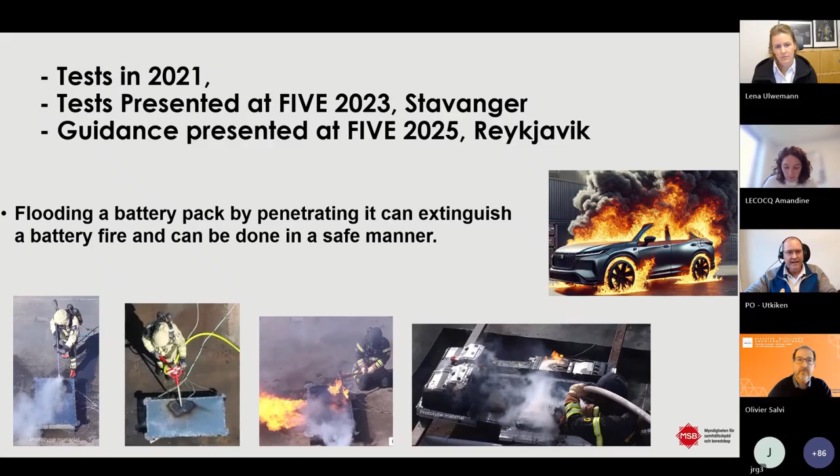Here is the key to what we are talking about. If you look at this, you see thermal runaway for a couple of seconds, and then it's a regular fire. During this process, we heat the adjacent cells. By getting water into the battery pack, we cool the cells that are on fire with thermal runaway or fire afterwards, and we cool the adjacent cells. That is basically the key, to get water inside and then cool as much as we can.

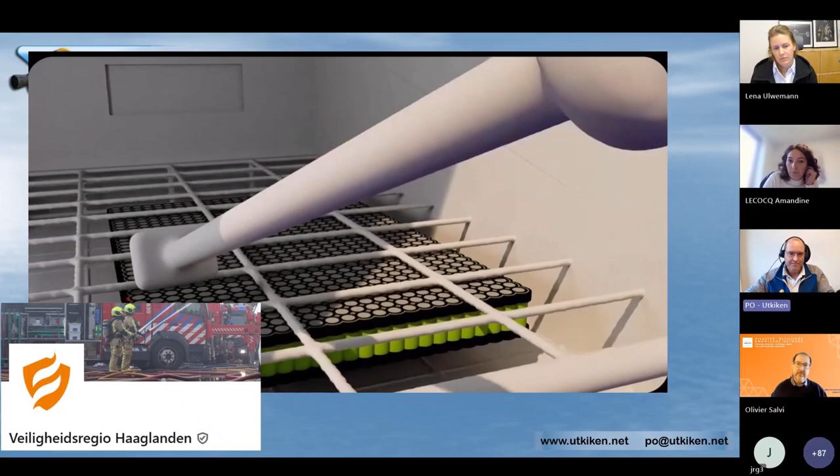This is a video clip from the Netherlands Fire Brigade which illustrates it very well. If we spray water into the battery pack and cut a hole in it, we might start new thermal runaways, like the last red cell you saw there. But since we are at the same time getting water into the battery pack, we are cooling the other cells. So it doesn't really matter that we get a new thermal runaway or several new thermal runaways, because the water will do what it's designed for.

After our test, we have seen tests in the Netherlands last year that were successful. The NIPV did some testing there, burned two EVs, and in both cases it was a success. In France in June, we saw SDIS 91 do their testing, also successful. So we're starting to get the evidence that this works, and it will also keep the batteries extinguished most of the time. We don't have immediate reignitions. There are certain times in the process where it's more likely, but overall it's been working very well.

In Sweden, we have some real-world operations. Here we had a vehicle with a thermal runaway in the battery pack, extinguished with a fog nail - I'll get back to that. The second one was a vehicle put out with a cutting extinguisher, and then we had an electric bus that was also put out with a fog nail. From the MSB perspective, the Swedish Civil Contingencies Agency, the fog nail is not a recommended tool, so this was done without following the recommendations. But what we saw was that we got water inside the battery pack and it worked.

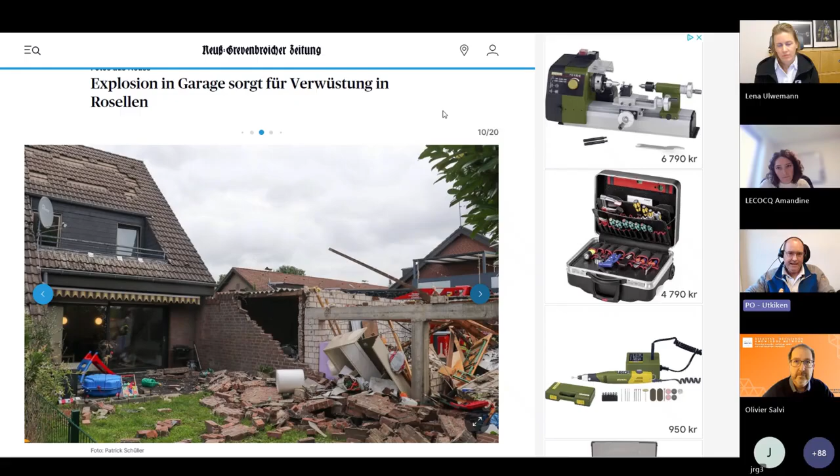Then I'm going to talk a little bit about explosions, because I think that's the largest hazard we have to navigate through or around. We have all seen those pictures. This was an explosion in a vehicle where the garage roof was blown away, the walls were blown away. We have different levels of this - this is also something you've all seen, the Jeep at the fire station that blew the roof up in the air due to a gas explosion.

What this gives us is that we have to navigate all those different events. It's not always super dangerous, and we can have a fire in a battery pack where we have the white gases, the smoke as I call it, but we might be able to do something about it.

Our thoughts here is to handle it like a gas leak. If you have a flaming thermal runaway, then it's much better from an explosion perspective than if you have a smoking thermal runaway. Firefighters have a lot of tools already in the toolbox if we think of it as a gas leak of a combustible gas.

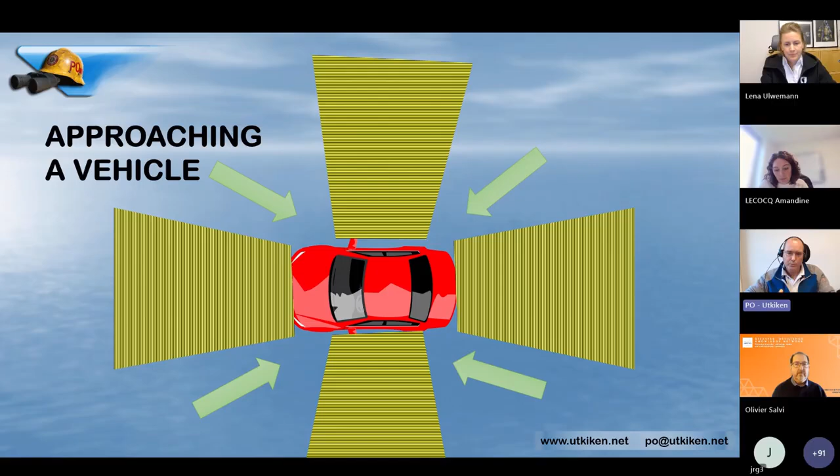For example, approaching a vehicle, we know that it's most likely that the pressure from the explosion will go to the sides. So if we approach the vehicle from 45 degrees, we can get closer to the vehicle. If what we want to do is ventilate it, this is a very good example from the Netherlands, where they use a cutting extinguisher with abrasive to break one of the windows from a distance. In that way, they get the vehicle ventilated.

The other example is the one I showed you from Sweden, where they used a tool to break the window, wait for a while, because that seems to be like with a regular backdraft, that it takes a while for the oxygen to get into the compartment, and then we have the ignition.

If we now want to get water into the battery pack, when can we expect a result? Because that will also vary. And it will vary because of the tilt angle of the vehicle, if we are in the correct compartment, because we can have vehicles with several compartments, and there the rescue sheets are very valuable.

If we, for example, have large holes in the bottom of the battery pack, like Tesla, for example, where their battery pack bottoms can burn away, and if we have that kind of construction, then this method will not work. So we need to be aware that it's not a single solution for everything.

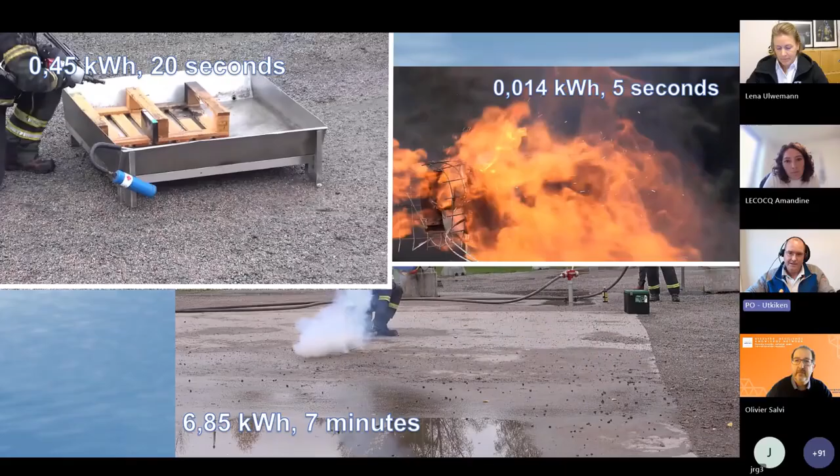Also, cell and module size matters. This is what I'm talking about here. We have three different sizes. The smallest size, they have a thermal runaway for 5 seconds. So if I get water inside the battery pack, it will be very fast for the cooling to work.

The upper left, we have a 0.45 kilowatt hour battery cell, and that thermal runaway will go for 20 seconds. In the bottom, we have a Volkswagen battery module with pouch cells, which will go through the module for 7 minutes. Since we are talking about cooling the adjacent cells, we can't expect a result from the cooling until we have the original thermal runaway burned through.

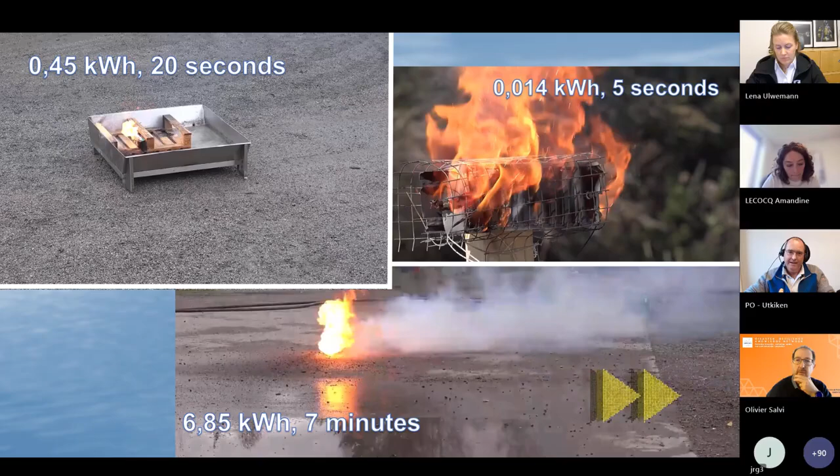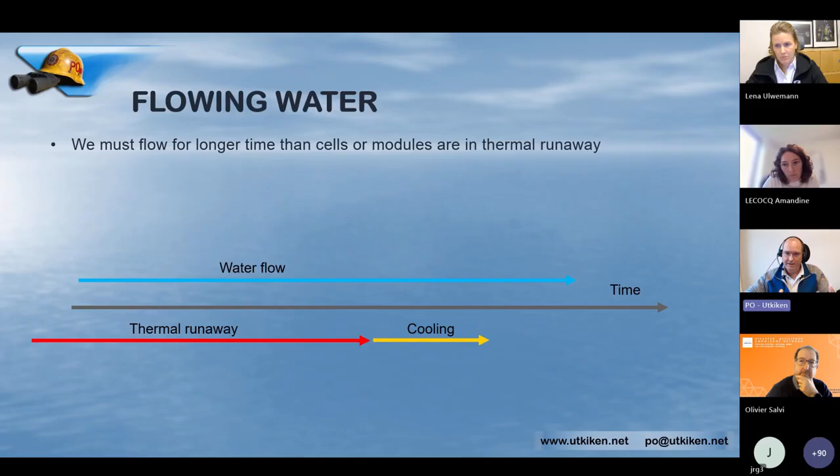What that gives us is a timeline for how we must flow water. So we must flow water long enough to outlast the thermal runaway. We need an additional cooling time plus some extra time. This, I think, can be frustrating for firefighters, because we can stand spraying water for like 7, 8, 9 minutes, and we don't see any results because the thermal runaway is still going on in the original cell. But then we need to be patient with it.

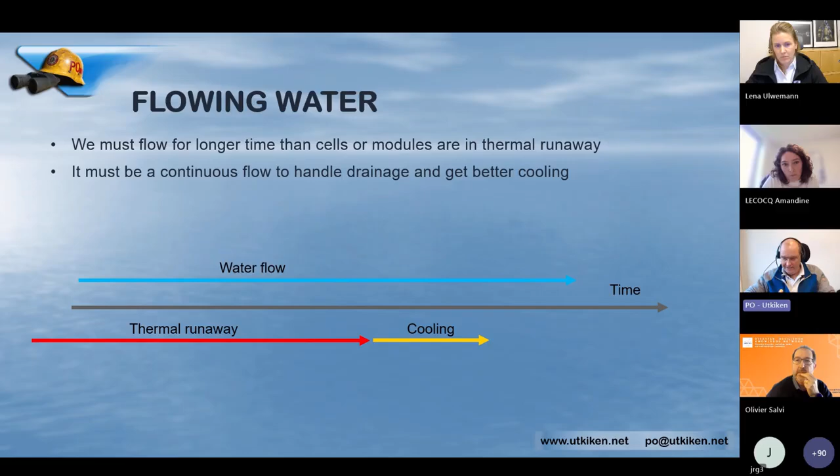Finally, I would like to show this video here. If this is what we have when the caller calls to the dispatch center, they say we have lots of flames, we have a lot of smoke.

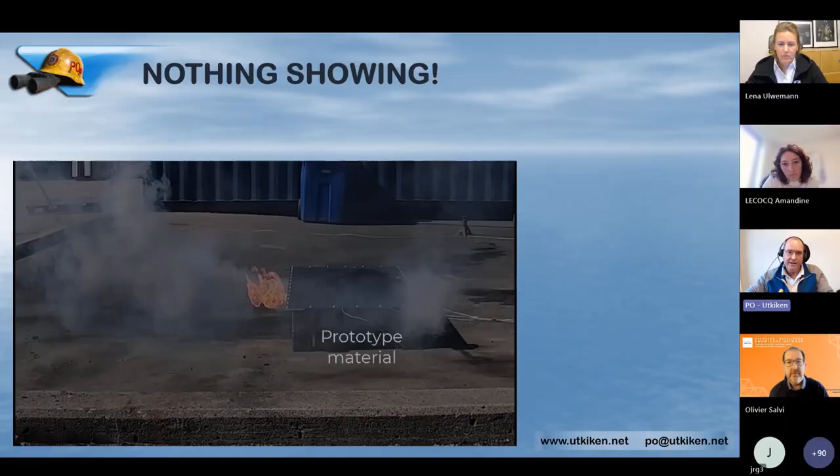Battery packs are today very well designed. They are designed not to burn and to have a slow fire spread. This means that what we're looking at now could be what the fire service sees when they arrive. That is nothing. So we need to be aware of that and use that time wisely to prepare for what could happen when we start to get this fire again.

Also talking about good design, they are designed to be able to handle a single thermal runaway, and sometimes that works. If that is the case, then we should not make any holes in the battery pack, because then we have a self-contained battery pack fire. With that, I would like to go to my last picture. I'm just going to see if I can do that here.

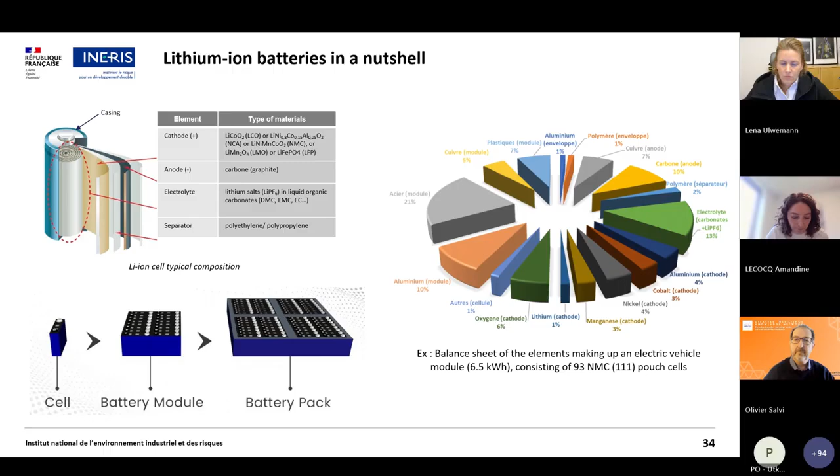As you know, lithium-ion batteries are prone to thermal runaway phenomena. This thermal runaway can occur when the battery is subjected to external aggressions, such as mechanical, electrical, dysfunctional, or thermal aggression. Or it can occur due to internal factors, such as manufacturing or design defects.

The thermal runaway of one cell can propagate to adjacent cells, to the complete module, pack or rack, or even to the complete vehicle or system.

Different effects can occur during thermal runaway. It can lead to gas and particle release, fire, explosion, as was shown by Paola, and also projections of incandescent materials or small cells.

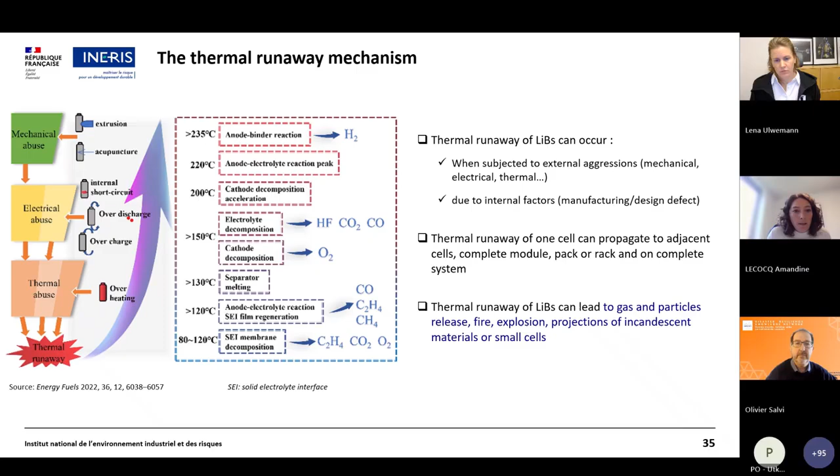Here is a summary of these different effects. During thermal runaway of lithium-ion batteries, heat is generated, producing thermal effects and also fumes. These fumes are composed of flammable gases, toxic gases, and particles. We'll go into more detail in the following slides about this composition of fumes.

In some specific cases, projections can also occur, also called the missiles effect. These projections are mainly seen during fires in storage or recycling plants, or in some specific cases of violent crashes of electric vehicles. It's mainly due to the small cells found in these types of packs on different vehicles or in bulk storage, for example.

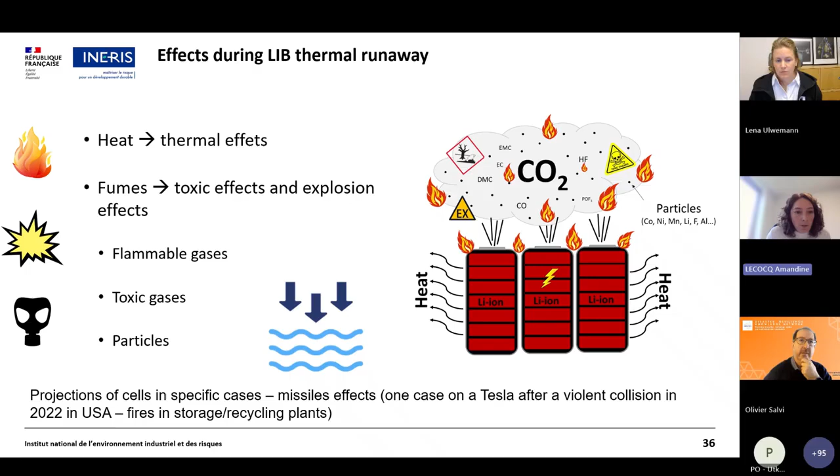Lithium-ion batteries are involved in many accidents across many applications, from the smallest like smartphones or scooters, through medium like cars, and also the largest like battery energy storage systems (BESS) and recycling facilities. Here are some examples and pictures of accidents that occurred in these many applications.

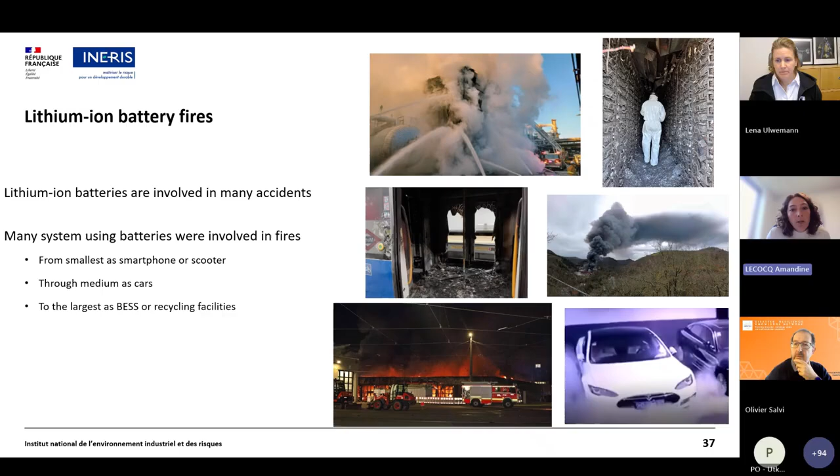Here is an example of an accident that occurred on a BESS in the south of France in 2020. It was a mixed electrochemistry of lithium iron phosphate and supercapacitor. It was a new container being put into service. A fire occurred in a BESS container that contained batteries.

The difficulty in this case was that these BESS containers containing batteries were stacked, one container above another. This posed difficulty of access for firefighting services, and also at this site there was a lack of nearby water points, making it difficult to extinguish the fire.

Also, this container was equipped with an extinguishing agent based on phosphate salts, but it was inefficient to tackle the fire.

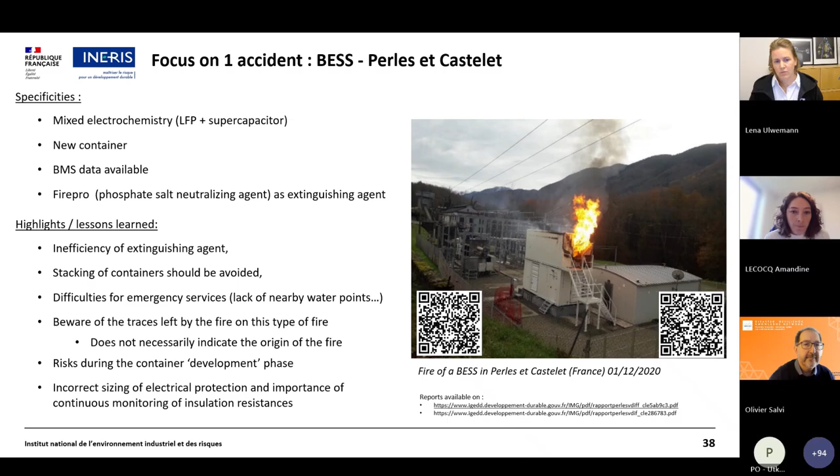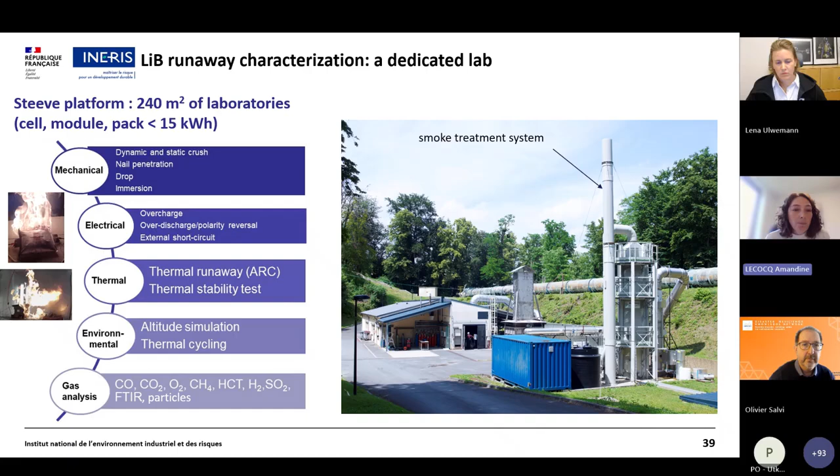At Ineris, we have different safety platforms to characterize lithium-ion battery runaway. The first is the Steeve platform, where we perform different types of tests: mechanical abuse, electrical abuse, and thermal stability tests on batteries, to characterize the effects and also analyze the gases emitted during the abuse tests, as well as particle analysis.

The second platform is the fire platform, used to perform fire tests but also mechanical and electrical tests on larger batteries, since the test chamber is a higher size. For example, we have a very large fire safety chamber of 1,000 cubic meters used to perform tests at pack level, electric vehicle level, and system level. In this platform, gas analysis and particle analysis are also performed.

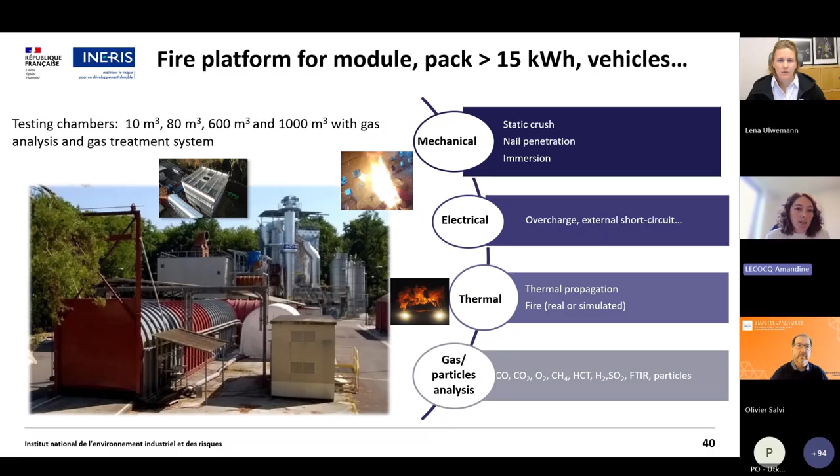So we have different types of measurements, such as physical measurements, in-situ generation characterization, and online gas composition measurements, including smoke and particles. We also perform water sampling and composition analysis. I will show you some examples of results we have.

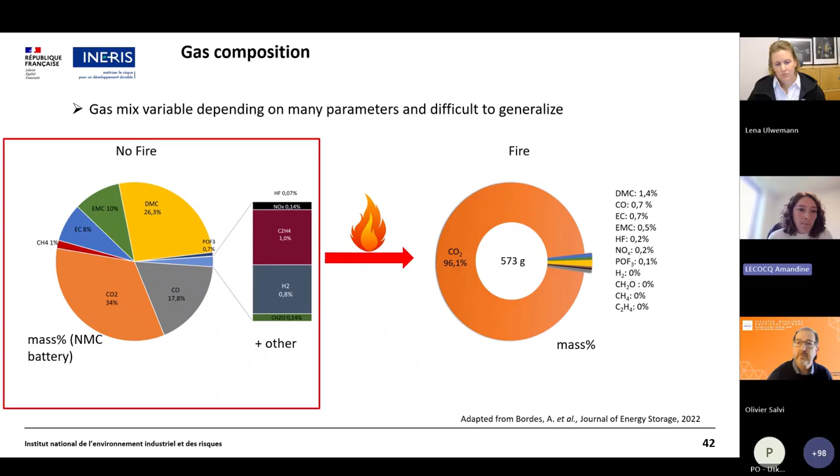Here is the gas composition of two cases. On the right is the typical composition of a battery fire when we have little fume generation, so it's mainly fire. In this case, the main gas produced is CO2, at more than 90%. On the left is a case where we have only fumes, and you can see the composition is completely different, with a lower amount of CO2 and a higher amount of flammable gases, as represented in this graph.

In the case of fumes, we have highly flammable gases such as hydrogen, methane, ethylene. Also both toxic and flammable gases such as carbon monoxide and carbonates, which are the solvents used in the battery. And also highly toxic gases such as formaldehyde and HF, and in some cases POF3, which is also toxic.

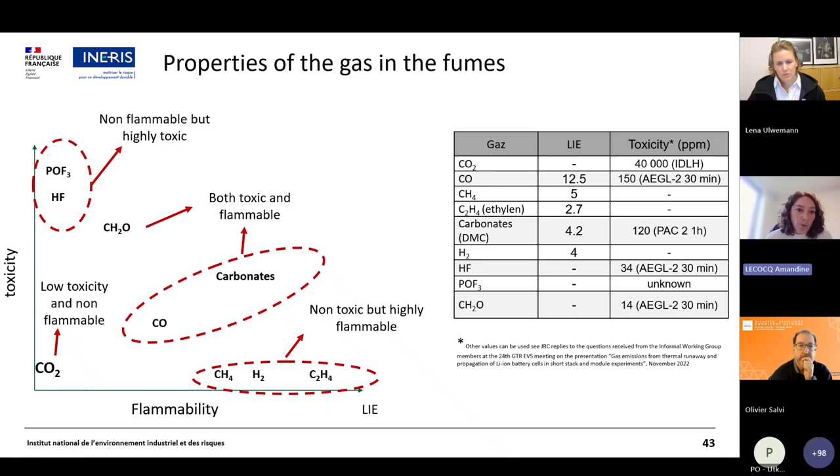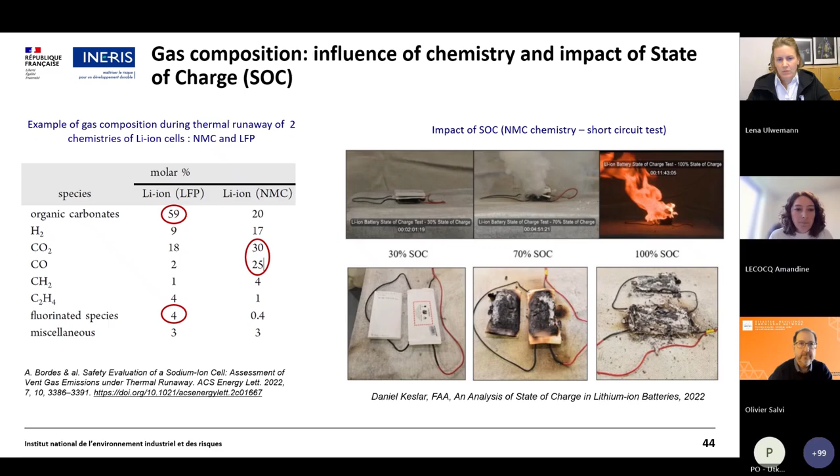So, talking about explosion risk: under certain conditions, for example in underground car parks or garages, accumulation of gases emitted by the thermal runaway of the battery can generate an explosive atmosphere that can lead to an explosion.

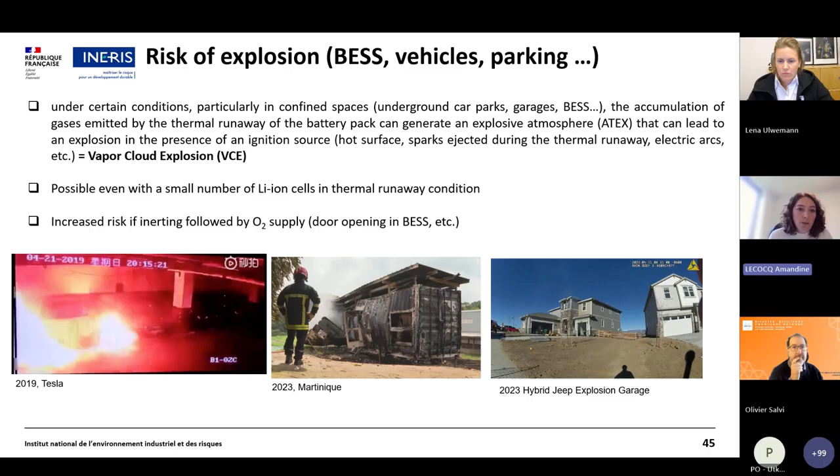Here is another example. In the center of the picture is an explosion that occurred in a BESS, and on the left is a Tesla, which just shows fumes that rapidly ignite and then go to fire.

So the risk of explosion needs to be taken into account during the extinguishing process. This is the Jeep video already shown by Perola. It shows that water-based agents may extinguish the flames, reducing thermal effects, but extinguishing the flames does not mean the thermal runaway reaction has stopped. The reaction continues, and flammable gases can still be produced, as I've shown you before. So the risk of explosion is present and needs to be taken into account - the risk shifts from thermal to explosion.

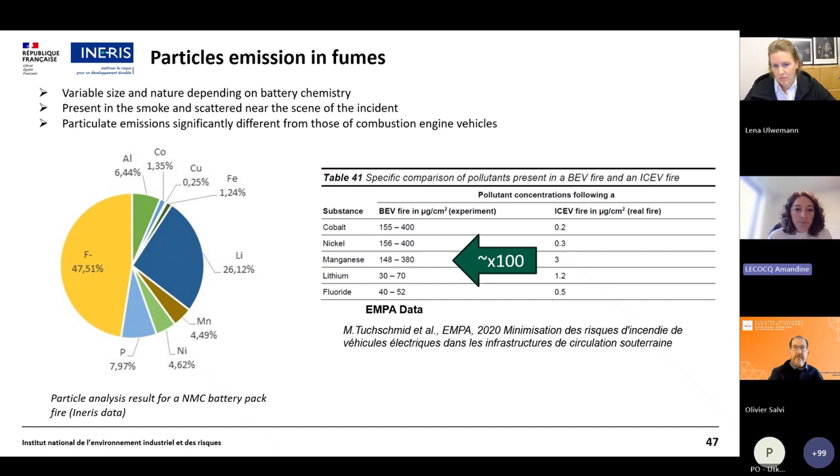And in higher quantity on the upper part of the clothing, on the jacket, compared to the trousers. This means that decontamination of the clothing needs to be taken into account and is recommended after responding to lithium-ion battery fires.

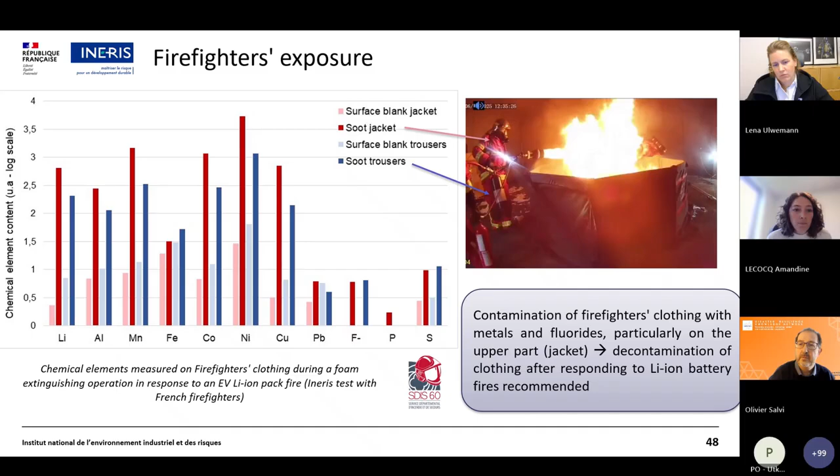Regarding water runoff contamination, there are different strategies to tackle a fire. The first one is external cooling and smoke abatement of the fumes. In this case, the water runoff has shown some contamination with cobalt, manganese, nickel, and lithium also, shown in the water runoff composition after intervention.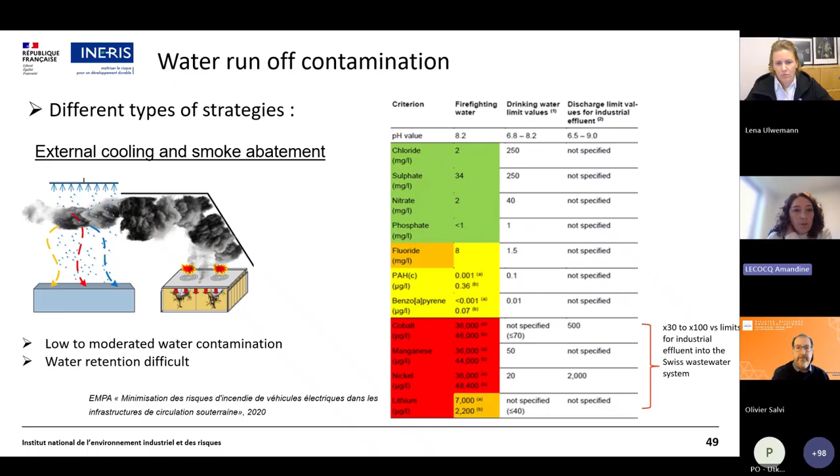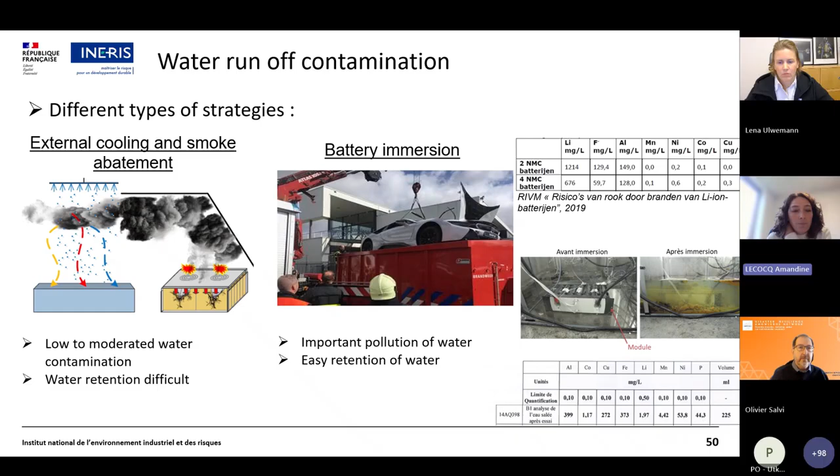The other possibility is battery immersion or electric vehicle immersion. In this case, the same components are found in the water. The last one we studied is direct contact with water, where water is directly applied to the battery fire.

Here you have the results of some analysis we performed recently on this water after testing. Different types of tests were done: a sprinkler test, where we put a fire on a lithium-ion battery pack and triggered the sprinkler system on it. We also performed a medium density foam test - that was the picture just two slides before with the firefighting intervention. And the last one, in green, is a high density foam test.

Then we analyzed this water, and you can see that it is contaminated with metals - the same nickel, manganese, cobalt, lithium, aluminum, and also presence of fluoride. For the foam tests, we observed the presence of sodium and sulfur at a higher quantity for one of them, coming from the emulsifiers used for this test.

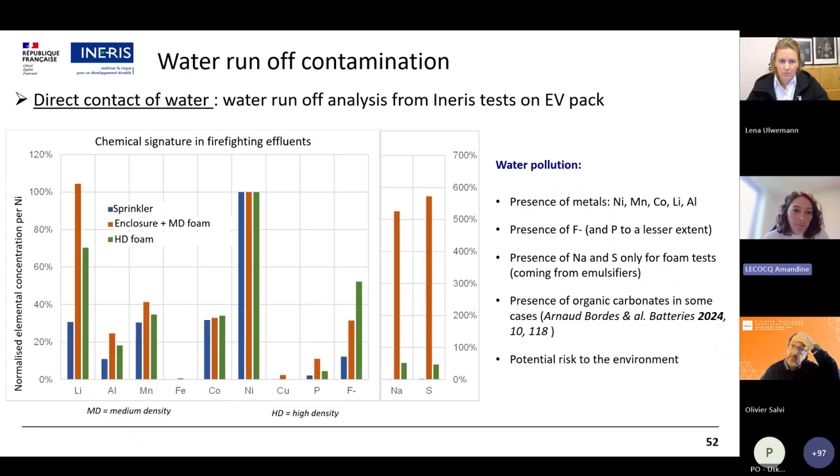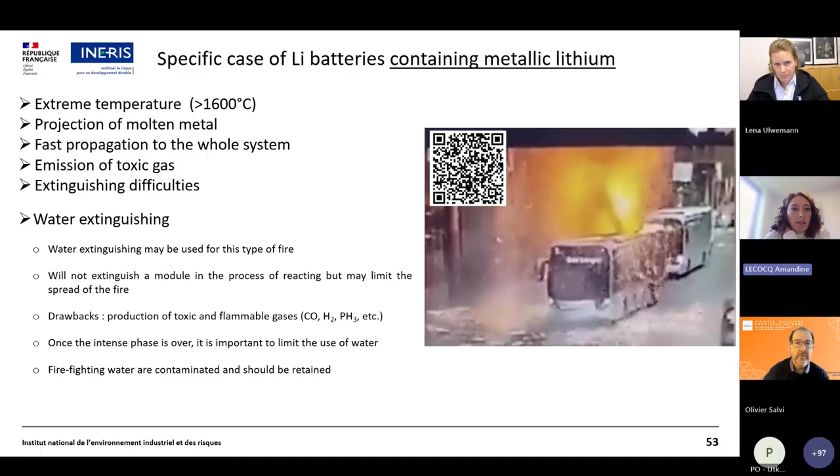So here is another case. Before I talked about lithium-ion batteries, but there exists another type of battery that contains lithium metal - not lithium-ion batteries, but lithium metal polymer batteries, or batteries containing lithium metal. It's a different technology, and in this case the reaction is a little different, with higher temperatures reached, superior to 1600 degrees C. We'll see in this video the projection of molten metal and a fast propagation to the whole system.

This was a bus, an electric bus in Paris, with a lithium metal polymer battery. You can see the projection of lithium metal at several meters from the bus, with very high and hot flames. Here it's a complete fire of the bus. In this case, it's a really fast combustion, and it can pose some difficulties to extinguish.

However, we performed some tests at INERIS on this technology. These tests have shown that water may be used for this type of fire, but it didn't extinguish the module while it was under thermal runaway. It can just limit the spread of the fire, but it produces toxic and flammable gases. In this case, we observed a phosphine emission during the extinguishing of the fire, which is highly toxic. So it's important to limit the use of water on this type of technology.

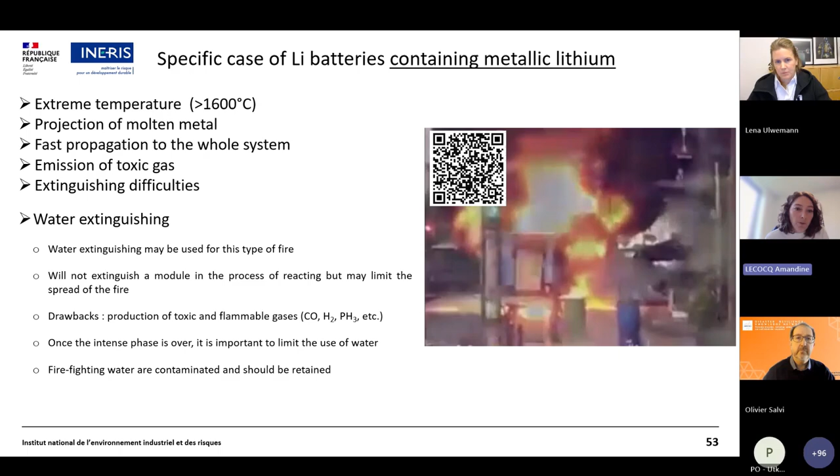So to conclude, regarding lithium-ion batteries and thermal runaway of lithium-ion batteries, fumes contain both toxic gas and particles. Fumes might be flammable and also contain HF.

During the extinguishing process, be careful of the shift from thermal to explosion risk. The clothing of firefighters can be contaminated by chemical elements specific to batteries, such as heavy metals and fluoride. And runoff water can be contaminated with metals and electrolyte solvents.

So retention is recommended.

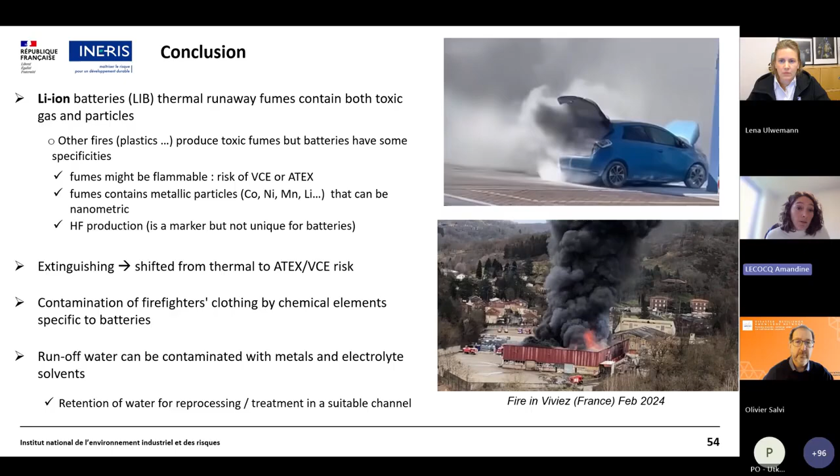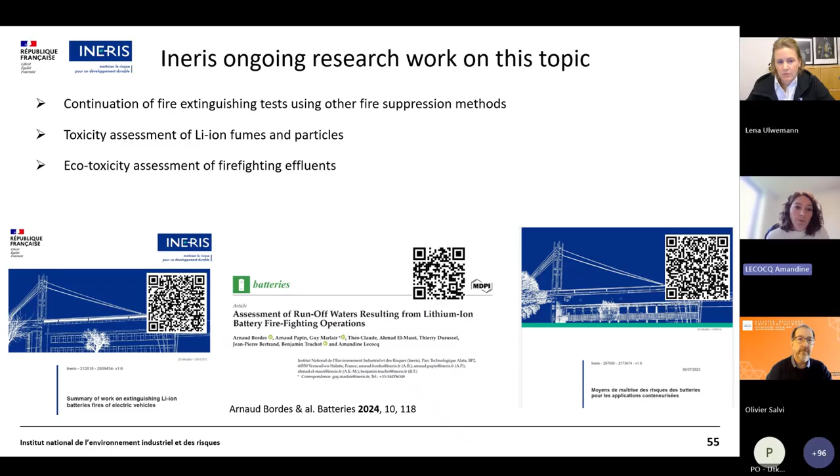So here is just an overview of ongoing research on this topic. We continue at INERIS to perform some extinguishing tests with other fire suppression methods, and to go deeper into the toxicity assessment of lithium-ion fumes, particles, and ecotoxicity assessment of firefighting effluents. So here is just some report that can be useful to read.

Thank you for your attention.

Thank you very much, Amandine. It has been again very informative, and we better understand that the chemistry of the battery is very important. Depending on the type of battery, there are different types of gas that could be emitted and different kinds of particles. And also an important aspect is the quantification of the contamination on the garments, on the equipment of the firefighters.

I think this is a topic that requires a lot of attention in the future. The cleaning is always a challenge, but it's really important in that case to pay even more attention because of the contamination with heavy metals.

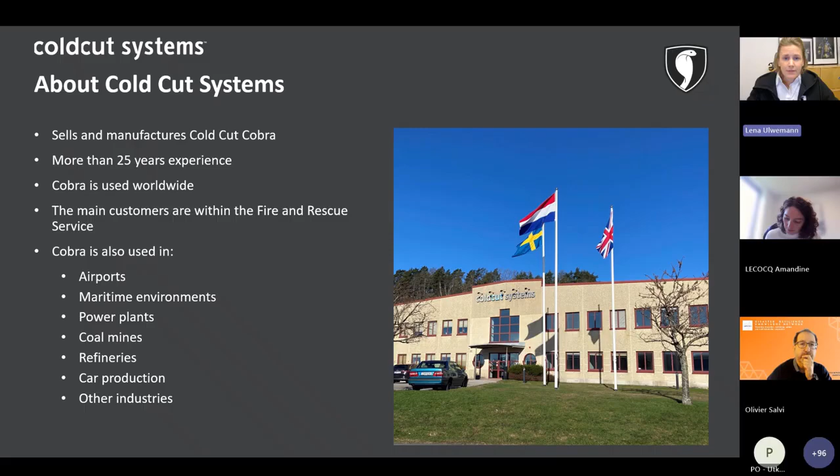So Cobra lets firefighters cool the hot fire gases from a safer position outside the fire compartment. And it does so by using an ultra-high pressure water jet, which is mixed with a cutting media called abrasive, and it can cut through any building material in just a few seconds. And once the jet breaks through, it makes only a small hole which won't let any extra air in, and the fine water mist that follows creates a huge cooling surface area, which makes gas cooling both fast and very efficient.

All this is done using only 60 or 30 liters per minute of water, depending on what system you have.

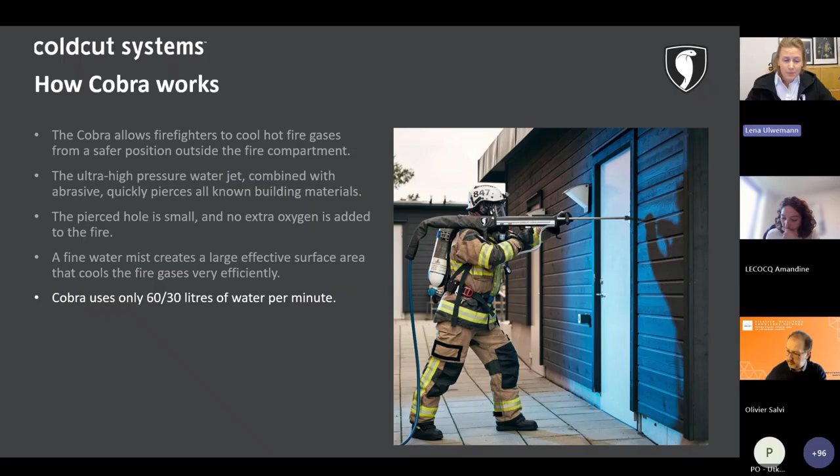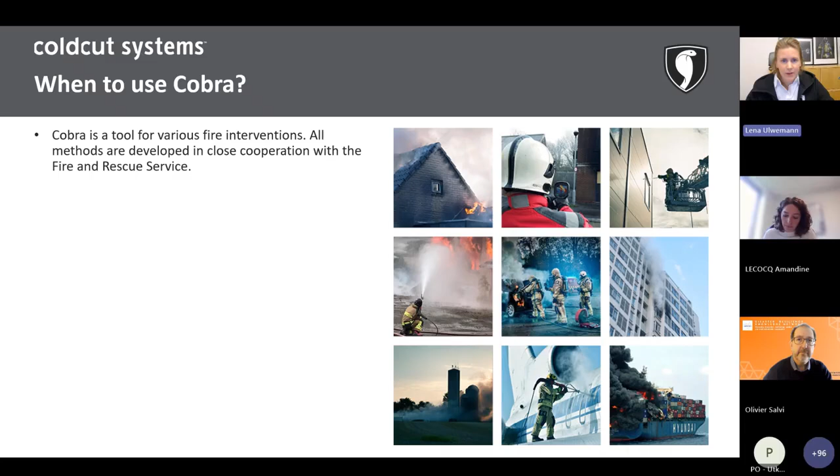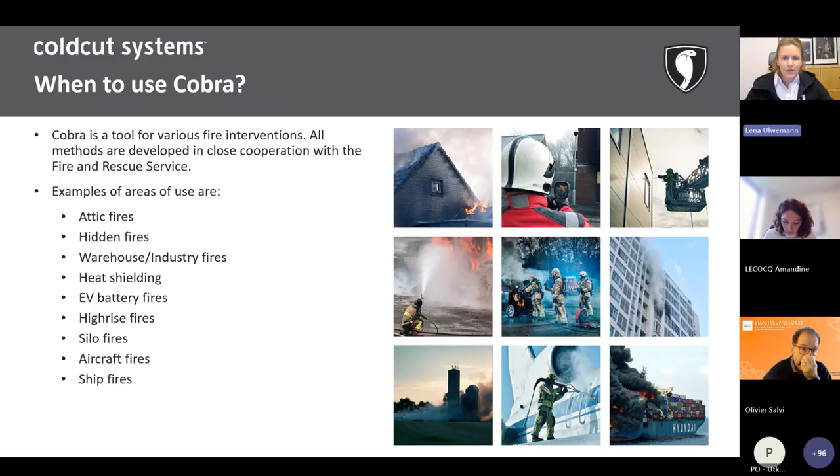So Cobra is not for just one type of fire, and over the years, the system has been adapted for many different kinds of incidents, and we always develop the methods together with fire and rescue services. Examples of use are hidden fires, attic fires, industrial fires, and more recently, EV battery fires. And because Cobra is used in so many different types of fires, it's not just about having the right tool, it's about knowing how to use it efficiently in each situation.

And that's where Cold Cut Academy comes in, where we develop the methods, tactics, and conduct training for using Cobra. And we provide courses ranging from basic operator courses to instructor courses, refresher courses, and more targeted courses such as incident commander course, and of course, the new Cobra and EV battery fire course, which focuses on one of the most complex challenges firefighters face today.

So with that said, let's look at the development of this method of handling the propagation in EV fires.

So we had quite a journey to develop this method, which would not be possible without help from experts in the field, fire and rescue services, car manufacturers, and national contingency agencies.

And in 2018, at Cold Cut Systems, we were contacted by the car manufacturer in Czech Republic, Skoda Auto, and they told us that they were using Cobra to stop propagation when having an event in their factory.

And this they had been doing successfully in over 20 traction batteries.

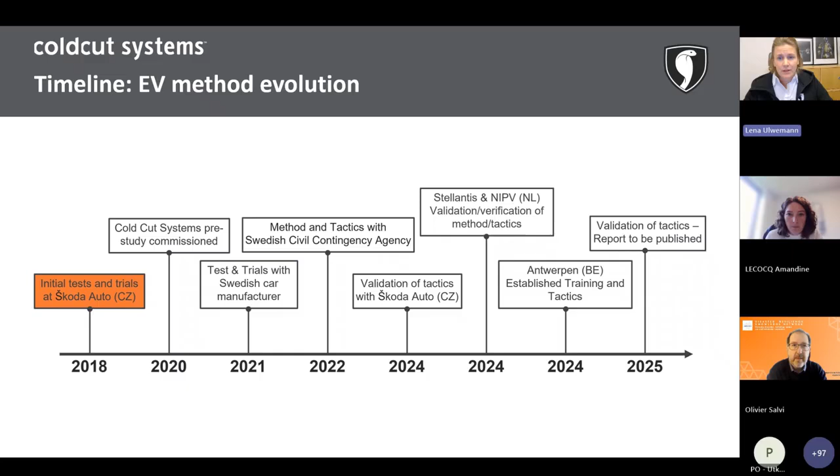So during 2021, we were carrying out tests on extinguishing battery packs with Cobra, and we had very positive results.

And overall, the project showed that it is possible to stop propagation in a battery pack by using internal cooling with water.

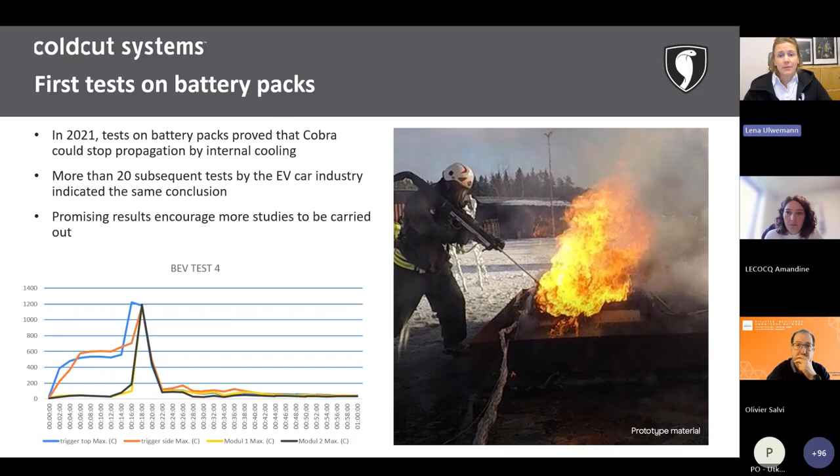Though we had not figured out a method quite yet, so more tests had to be done to develop a feasible method that could be recommended as a generic method for fire and rescue services to access and extinguish a propagating, or stop a propagating, lithium-ion battery in a vehicle.

So a little bit of repetition from what Per-Ola said. The Swedish Civil Contingencies Agency initiated a project to create a method for handling propagating batteries, and also to answer a lot of questions about risks and working environment for firefighters.

So we had the facts. Scientific studies confirmed that the only way to stop a propagating lithium-ion battery was to get water inside, or any available cooling media inside the battery pack, and cool the modules.

But the question remained on how do you get inside the battery pack? And for this, all the FRS needs a proven, repeatable method and a tool that could do the job.

So that project was a joint effort. It was battery experts, car manufacturers, and tool developers, including us, Cold Cut Systems, with the main focus to find a working method.

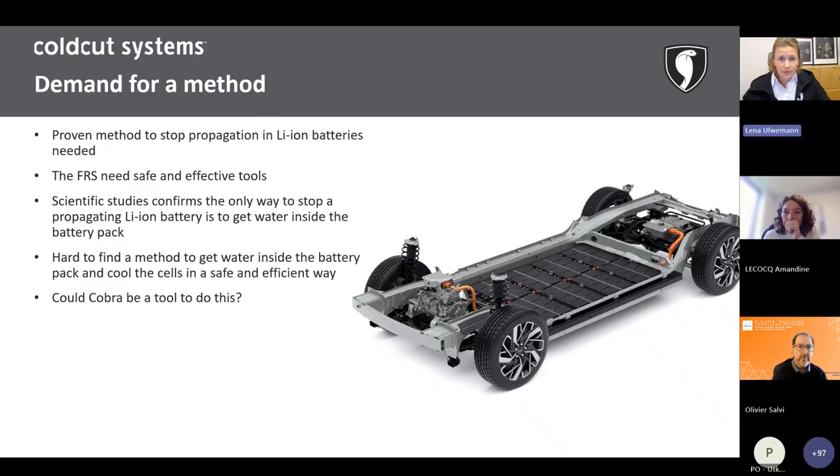How to cool the batteries with fresh water only, since that had already been confirmed in earlier studies that that was the key to stopping the propagation.

So with the goal of actually defining a method that could be used by firefighters based on tools that were already accessible for the fire and rescue services.

This result, as Per-Ola said, was demonstrated in a demonstration report and one guidance document on how to handle thermal events.

And these results were then shared with Skoda Auto, and they carried out more tests on their own, battery pack level and full-scale tests, and in all scenarios, the fire propagation was stopped.

And the phase after that was in the Netherlands, where the Dutch Institute IFV carried out similar tests and trials together with Stellantis.

We contributed by sharing experiences and observations and training the crews on the method. This also resulted in a method and a guidance.

And ever since, we know of several tests done by other organizations, and most recently, as Per-Ola mentioned as well, the SIS in France. We're waiting for their report coming shortly, and also the NFPA in the United States. We're waiting for a final report to be released in December, as I know it.

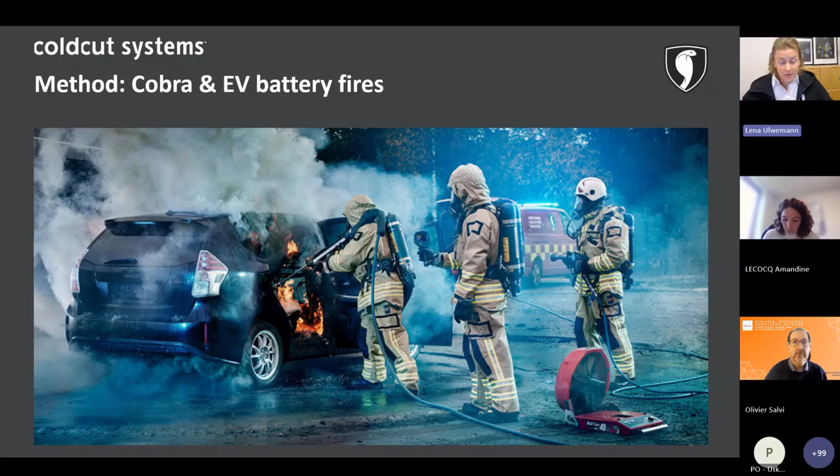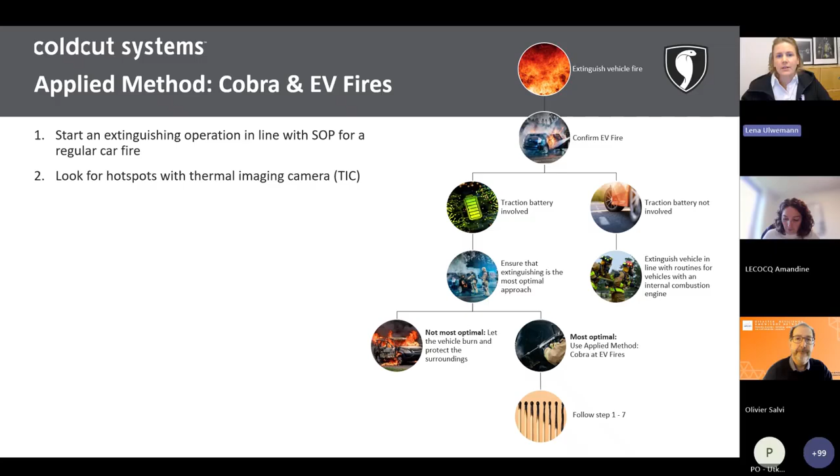So what we're going to do first is to actually start the operation by extinguishing it as a normal car fire in line with the standard operating procedures. And by then we can confirm if it's an EV fire or if it's not.

If the traction battery is involved, we consider doing an intervention or not, depending on the situation, the scenario. Where is the car placed? Is it in an underground garage or an open parking lot?

If we decide on continuing or doing the intervention, we are going to start by extinguishing the flames. We're going to look for hotspots with our thermal imaging camera.

We'll deploy Cobra close to the hotspot, not necessarily at the hotspot, but we want to establish an internal flow of water to cool the battery cells. And we'll continue to monitor this with the thermal imaging camera.

We might have to redeploy Cobra if nothing happens. As Per-Ola also said earlier, the modules burn differently long, so patience is key to success here.

Our target is to get below 50 degrees Celsius over time so that it's stabilized, and we'll monitor the temperature for a minimum of 15 minutes, or however long we need. If the temperature rises, we redeploy Cobra and do it all over again. We're also going to extinguish any remaining fires in the vehicle's interior and exterior with a regular firefighting branch.

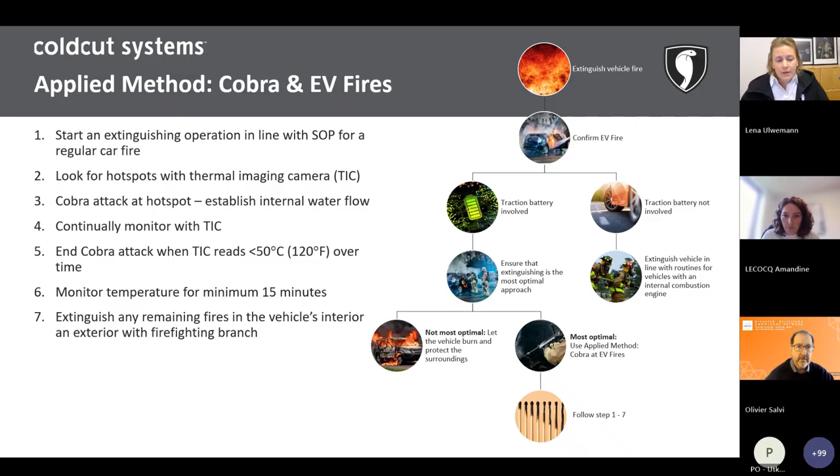I'm going to show a short video of this, and afterwards I'll quickly share some case studies on real interventions.

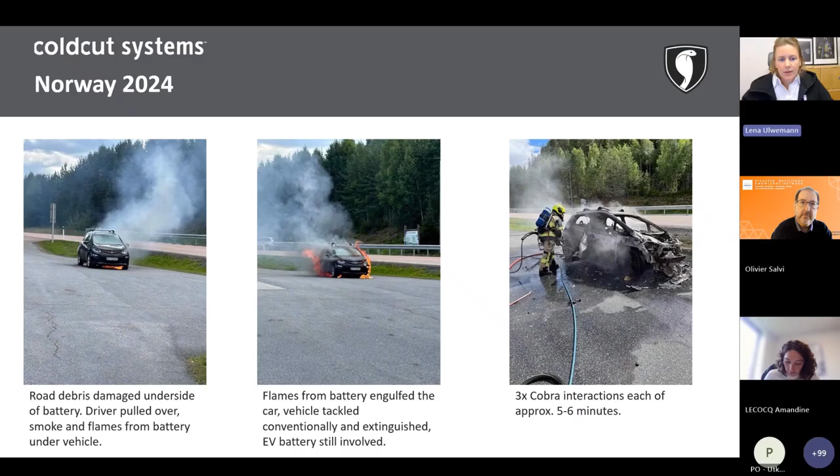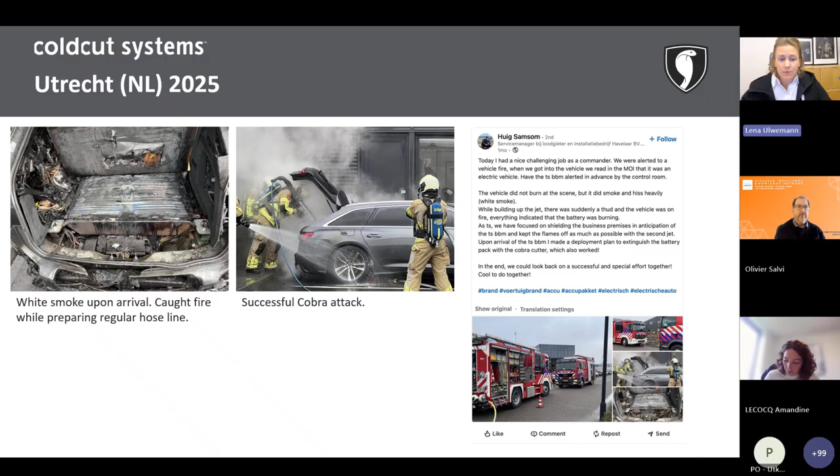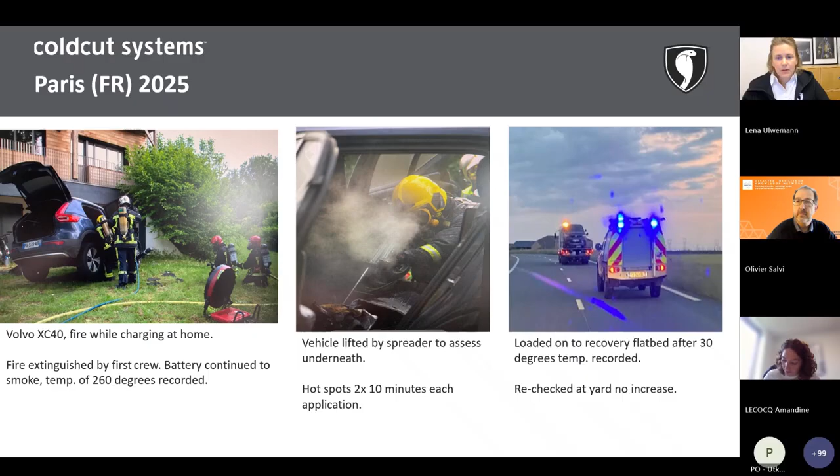So Cobra was deployed, two deployments of 10 minutes each. The temperatures dropped and the smoke dissipated, and the vehicle was then towed away without any reignition reported. 300 liters of water were used in that one.

In Tempe, they got called to a Tesla fire burning. You can see the flames coming out from underneath. They deployed Cobra for approximately 10 minutes, also using 300 liters of water to stop the propagation.

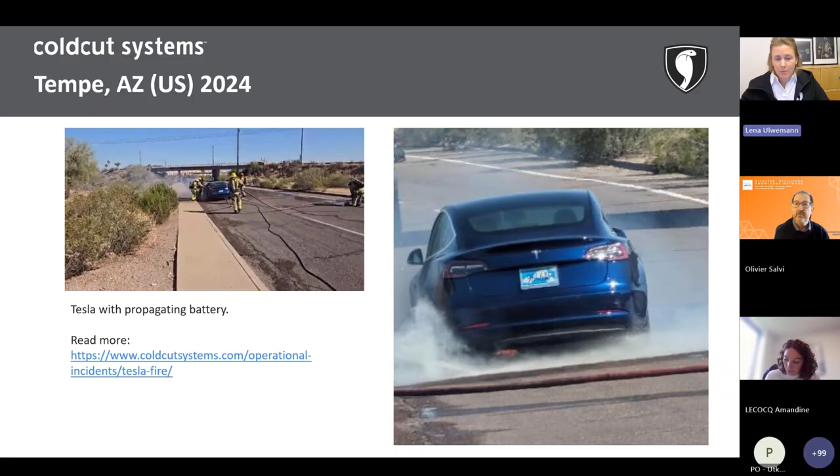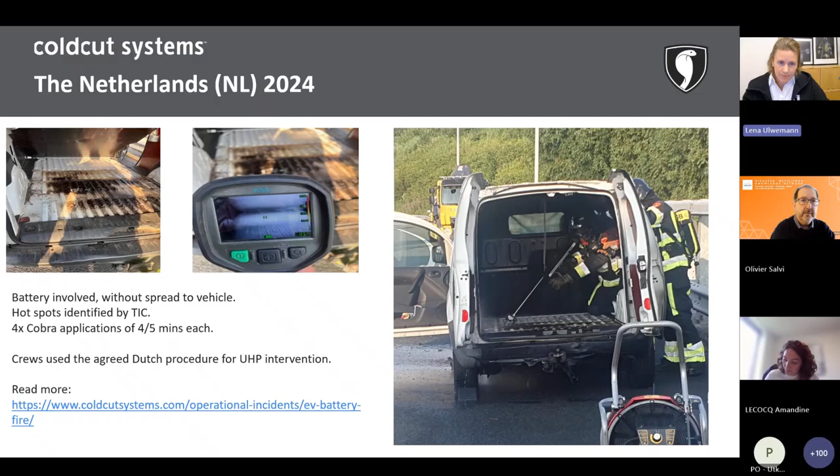And one more from the Netherlands, my last one. This is the department in Rotterdam, who answered a call on an EV fire that had also hit some kind of debris from the road, putting the battery in thermal runaway. Again, the driver pulled over, and when the crews came, they used the Dutch agreed procedures on how to handle a propagation in the battery. They deployed Cobra four times, 4 minutes each, to flood and cool the battery, resulting in a successful stop of the propagation.

That's me. Thank you.